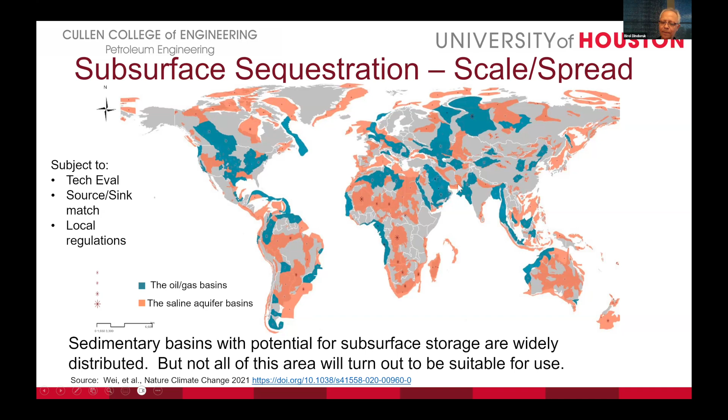Okay, so questions to be answered. Of course, we can drill the well, etc. The questions need to be answered from lab to the field at the end of the day. What you can do and what's relevant, especially at scale type of sequestration. Generally, what we do is this. We cannot do experiments in real time on it, especially if you look at the time scale.

So the general process for a large scale or even a pilot for subsurface implementation is that we run a numerical model. A numerical model can lead to virtual experimentation and certain outcome generations, and also help in monitoring and sequestering. But there are two issues with any kind of numerical model. One is, does it capture the physics? Do we have the right physics for it? Second is, how can I mimic that physics in real terms? In other words, how real it is.

Generally, if you want to represent a physical process, either we should have a predictive model, or, if the model is not predictive, how can I make it predictive? Making it predictive or more realistic requires certain types of data. So look at any of these models that we use for evaluation, well optimization: where would the CO2 plume be? What's the fate of it? And if I observe, where should I put my observation points or wells?

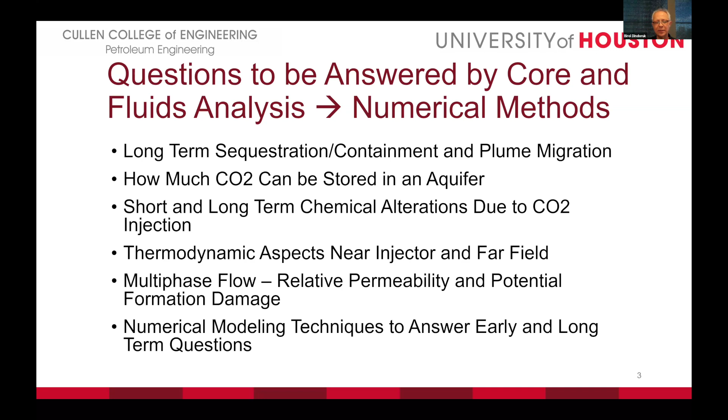But for subsurface appraisal data, whether it's an aquifer or oil reservoir, these are going to be pretty fundamental. One is petrography, thin sections, XRD, SEM analysis, scanning electron microscope, and calibrated porosity and permeability in representative lithologies. So do we have enough pore space, how many lithologies, how it changes, since eventually we are going to put it in a model.

Also, calibration of reservoir geomechanical and petrophysical properties. This is important, especially if we have the potential to exceed certain pressures. Generally, if you stay at or below initial pressure, we deem it safe. But when you bring in the reactive transport part of it, that may be different. And special core analysis and fluids. And of course, how fluids interact with the rock and in situ fluids will also be part of it.

And this includes seal capacity evaluation, reservoir model evaluation, trapping, and CO2 migration. For example, where would CO2 go? How would it go? What would be the trapping? And what would be the fluid compatibility? Would it precipitate something? Another question is, what would be the solubility limit?

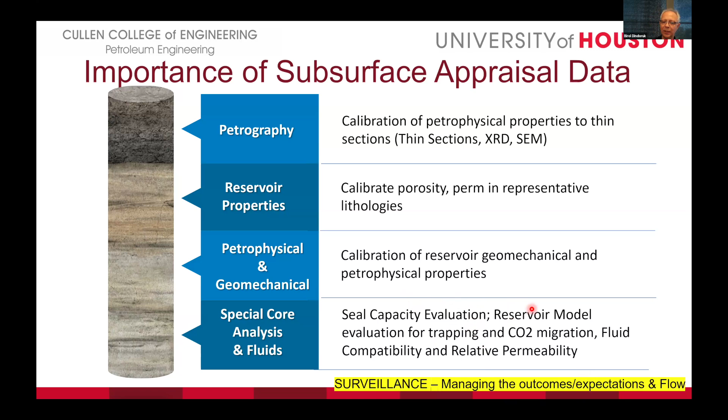So what are the similarities between aquifers and hydrocarbon systems and the differences? One is that water is everywhere, whether there is an oil reservoir or not, because one of the potential places that we can put the CO2 is depleted oil reservoirs or transition zones, non-commercial oil reservoirs, gas reservoirs, or basins, for example. One is the presence of water. It could be a natural transition zone, oil to gas, as well as oil to water, gas to water. I just give one example here.

But of course, it could be an artificial or man-made situation, that we have an oil reservoir and we water flooded it, or we had a gas reservoir, the aquifer encroached and flooded the reservoir. So in this case, we are almost converting a hydrocarbon reservoir into an aquifer. But of course, with hydrocarbon show.

Deep saline aquifers, well, one question about deep saline aquifers is how many of them are really pure water and salt? If you look closely, many of them have some hydrocarbon show, at least methane. So for example, the existence of methane is an impediment to CO2 dissolution. So we need to look at them. We can look at them in a simplistic way, but if you want to sequester something for thousands of years or whatever forever means, we need to look at all these things and we need to do relevant experiments.

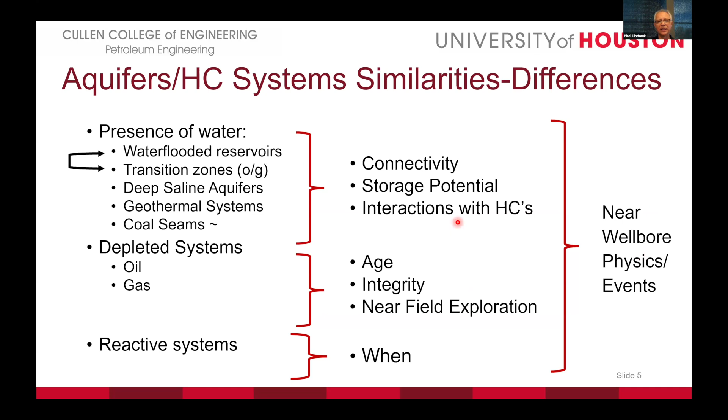So evaluation, I'm going to talk about experiments and data here. I'm going to focus on it a little more here for the sake of time. Maybe next time I'll talk about simulation. We use experimental data in analytical and numerical modeling. And of course, we use data analytics and correlative techniques.

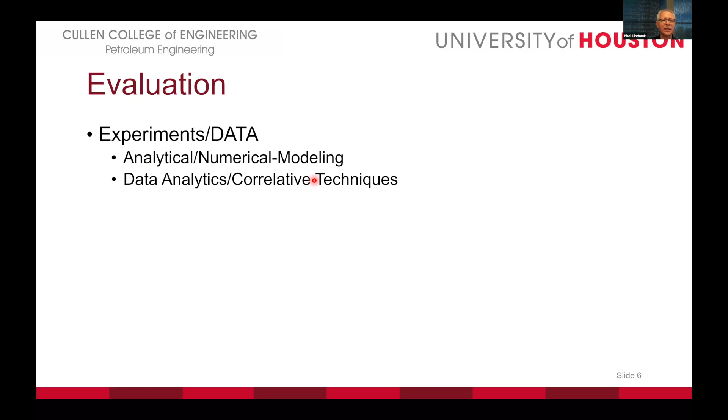For example, we have a recent publication where we use 2 deep water wells, a pair, with certain geological attributes and fluid attributes. And we generated an app through a sponsored project by Shell, actually. They sponsored it. It's declared in the paper as well. We look at how much CO2 we can inject in a deep water setting, as well as how much oil we can recover if we choose to recover, basically. But of course, we use experimental data and certain types of data analytics techniques for it. And I'll give you examples for some of the crucial data.

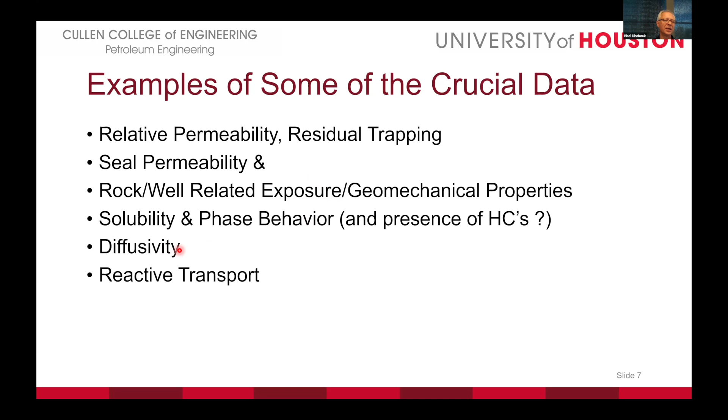One is relative permeability, residual trapping, seal permeability, rock and well related exposure, and geomechanical properties. Solubility, diffusivity is another one, because when the injection process stops, the only mixing mechanism left is the diffusive mixing, basically, and reactive transport is another one.

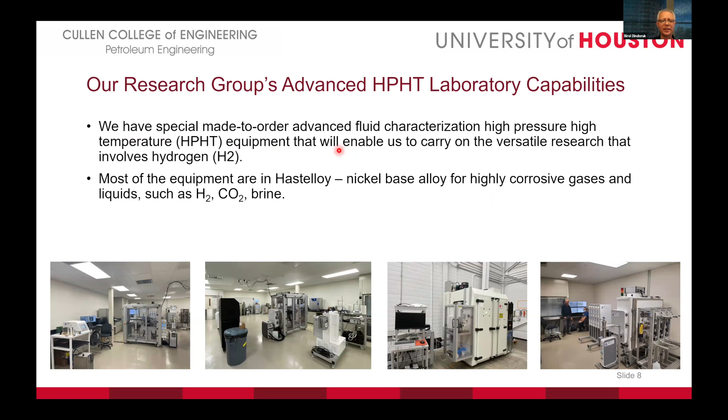So this is a scene from my laboratories, actually. We have state-of-the-art PVT cells and displacement apparatus, packed columns for reactive transport, and relative permeability measurement, etc. Anyway, if you want to visit, you are welcome to visit. We are in Technology Bridge, building 9, basically. So, of course, since we deal with CO2, you need a special alloy, etc. We took care of all of them as well.

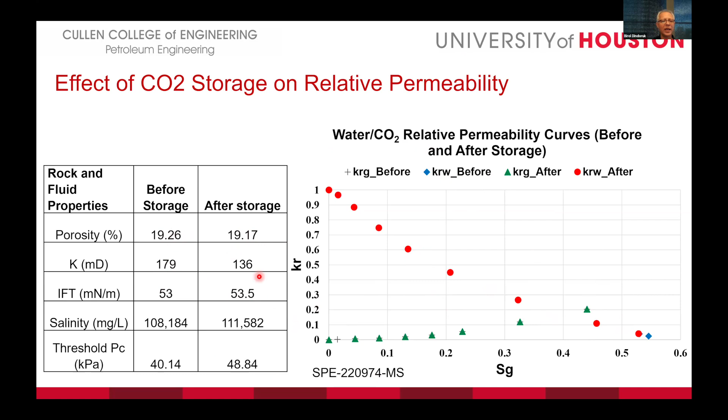So we did another experiment. Actually, this will be presented in a paper next month, at the CCUS conference in Houston, AAPG CCS conference. This is just one of the cases. So this particular one is a sandstone sample, but the sandstone has all sorts of other minerals in it. So we inject a lot of pore volumes of carbonated water in it.

Near the well, we pass a lot of fluid. And wells are extremely important for injectivity, safety, as well as if there's plugging, etc. That's what we are studying here. That's why we have so many pore volumes. So we did all sorts of measurements. We look at the mineralogy, we look at effluent analysis, we look at before and after analysis of the thin sections.

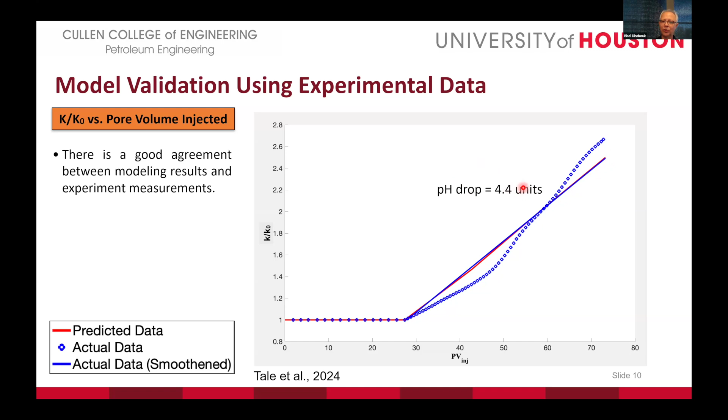Permeability improved more than twofold, actually, here. And the pH drop, because of CO2 exposure, is about 4.4 units. And residual trapping, we looked at the residual trapping. Now, this is a near wellbore aspect of it, but we looked at a simulation study as well. But before the simulation study, we have to provide a certain amount of data.

In general, CO2 goes into four different categories. I'll show you a plot of it as well. When we inject CO2, it goes into four different bins, actually. One is trapped, the other is the free CO2 plume, another one is the solution, and the fourth one is the mineralization. So time scales are different for those. And if you want to analyze all of them in one go, in multiple time scales, it's very cumbersome.

So we developed a process for it, actually. That's the paper that I was talking about. This paper got published. Instead of MS now, the dash is PA. That means peer approved. This is the precursor of it. So if you look here, we looked at the literature first, and we did laboratory measurements as well, because we have a joint consortium with Core Laboratories. In fact, we'll have a consortium meeting tomorrow, the fourth one, where we present the details of these studies.

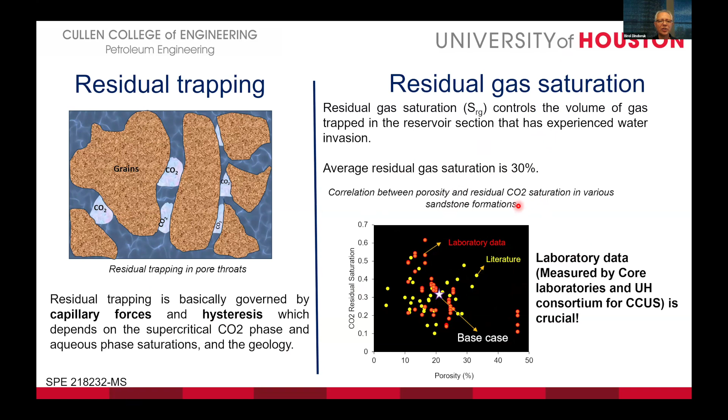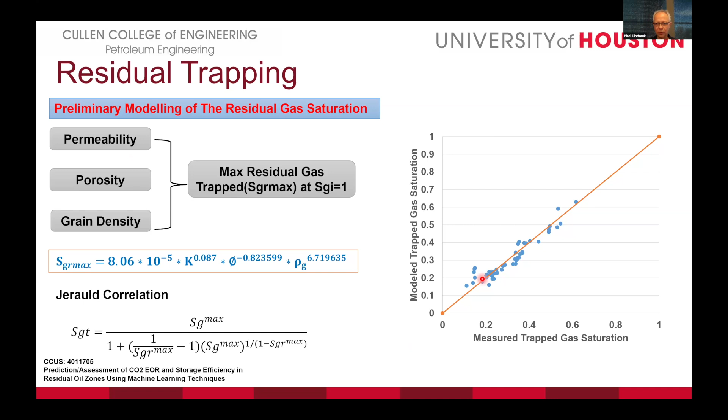So this is the supply end of it. You need to provide all this information: near wellbore phenomena, what happens; another one is the trapping, as well as relative permeability, and also what happens to your porosity. But we also need more information than that. I'll show you some of them.

We can also measure the caprock permeability. Caprock is normally shale or clay dominant seals, and they have nanodarcy type of permeability. You can say practically none, but over a certain time scale, this nanodarcy can transmit fluids, but also adsorb CO2. So we look at these from an adsorption point of view. One of the reasons we look at adsorption is that when everything stops, the limit that can react is the adsorbed amount, because the CO2 plume is gone.

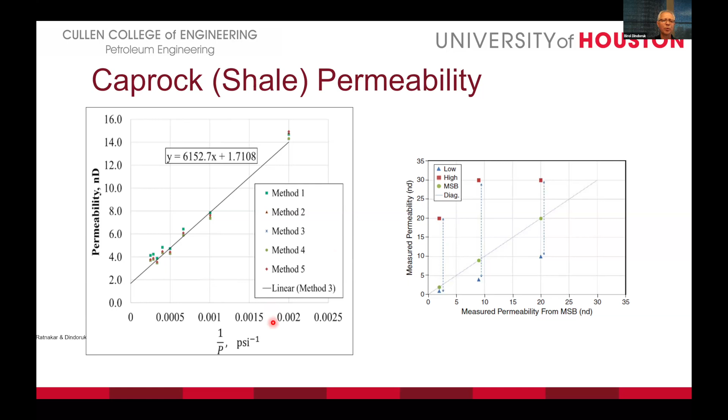Another one is that from adsorption, we were able to get permeability by a special immersion technique. We developed the technique with methane. Now we are working with CO2 with the same recipe, because we had to do a lot of experiments to be able to prove it. But the process is the same for any kind of gas. And then another study that we did is the following issue. This was also published about 3 years ago.

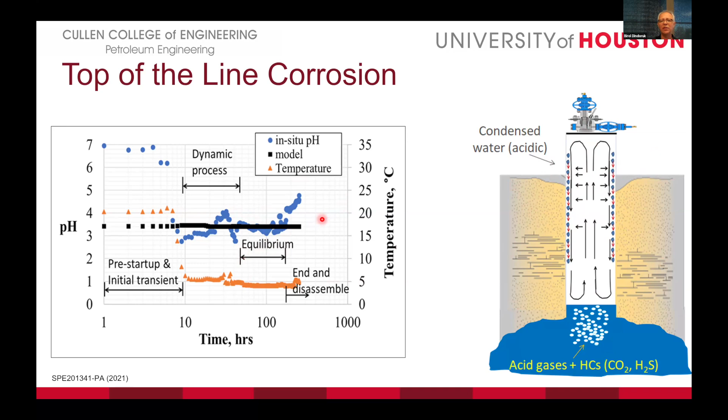CO2 concentration is related to pH and vice versa. We even did pH measurements in the laboratory for it.

Another one is when we look at solubility of CO2 in brine or aquifers, the question becomes the following. We have a CO2 plume and a huge amount of aquifer, and we have all the time, you can imagine, so to speak, for it to dissolve. Long time, in other words.

So now, most of the software packages and methodologies, they take sodium chloride TDS, or sodium chloride salinity. But the thing is that if you have different salt concentrations, your CO2 solubility is going to be different depending on what salts you have. So we did some data analytics type work, using physics-based models, on it.

We have 3 different papers, because as we progress, we figured out more and more complicated cases. At the beginning, we had pure CO2, then later on we tried other gases. Now we are working on mixtures of gases as well.

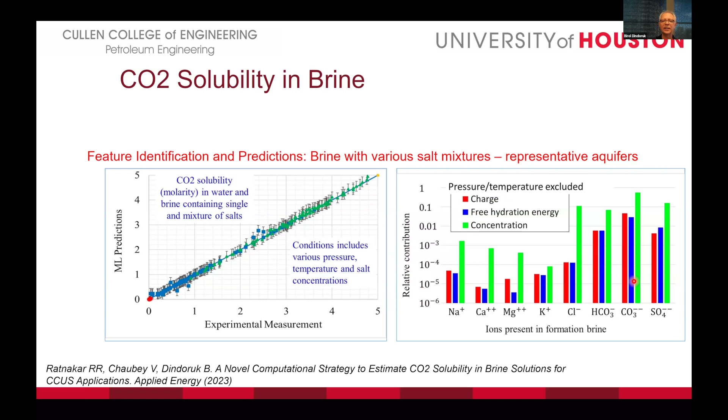So what we did is we put this particular thing after not only writing the software, not only writing the paper, we also put out an app, actually a free app you can find by searching, or through my website at University of Houston. We have about 4 different apps for different things, free apps, at least for now, that you can use, because maintenance is an issue. I don't know how long you can keep up with it, but it has been there about 2-3 years, all of them.

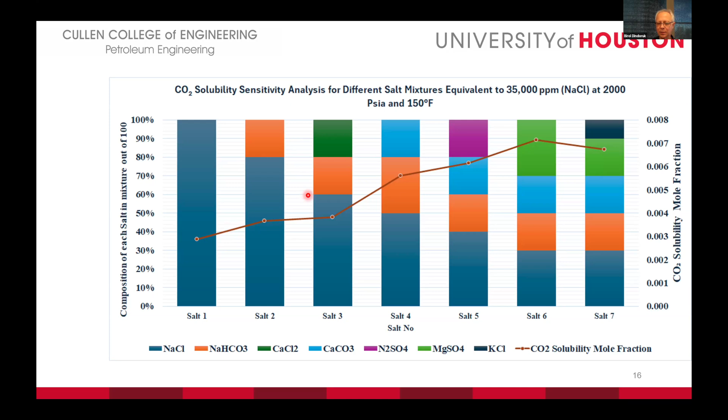Another thing, for example, this is also very important for geothermal waters, because geothermal waters have different salts and different solubility, and geothermal waters have CO2 in them as well, natural CO2. So there is an application for geothermal that I'm not going to go into the details of here. There's more motivation behind this work than what I'm focusing on here.

Another thing that I've done here is that, we are dealing with CO2 all over the place, and every time you need a different app, different software, and you have to pay, or you need to go to the website, click on it. So this is actually something I did.

I have a lot of experience in curve fitting, in simple terms. So I curve fit basically all the CO2 properties using NIST data in one go. For example, this curve is a continuous curve here, and this is a vapor phase. This is the supercritical region. We even inflated here to show you how good it is.

So you can basically take this equation. It's explicit, it's published. You can code it in Excel and figure out CO2 properties, not only density, but other properties like heat capacity, viscosity, and all that, because we want the freedom to code them into our own codes independently of other things. It may seem simple, but if you want a single equation for an entire system, especially if it's going from subcritical to supercritical, you don't even need to know where you are. It's a continuous curve.

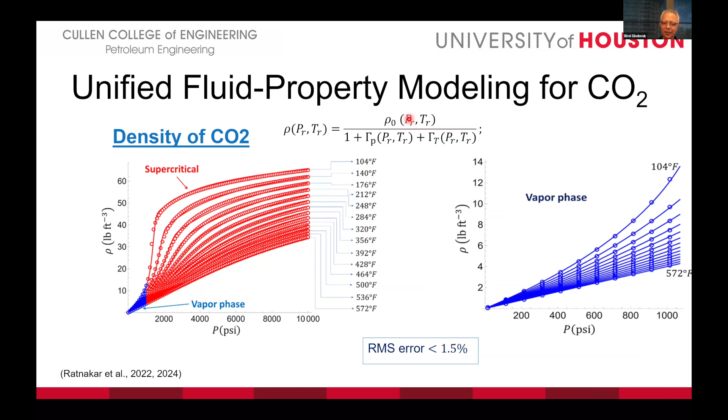There are other advantages. So another thing we're doing in our laboratory is this. I've been working on pressure and diffusivity measurements for 10 years continuously. We've made a lot of progress on this.

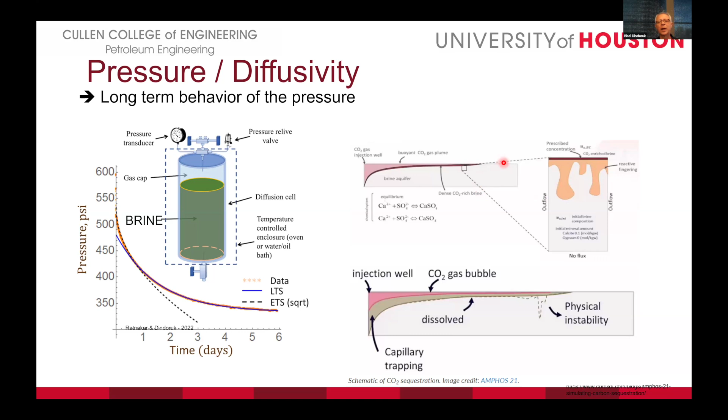One of the things about CO2 solubility is that when the CO2 plume overrides the column, it dissolves in brine, and the brine becomes heavier. As a result, it starts fingering because heavier fluid cannot stay on top. It becomes unconditionally unstable, leading to viscous fingering and viscous mixing. So we tried to figure out, before this onset of mixing, we looked at CO2 diffusivity. We measure other gases too, measuring CO2 diffusivity in different brines in our laboratory and modeling that as well.

Just last summer we published this. We measured diffusivity for different brines, and it turned out to be linear, with the inverse of diffusivity being linear with brine salinity. So if you want to mimic diffusive mixing after injection, since it's the dominant mixing mechanism, you need to put these numbers into a numerical model in a way that you scale it up. I need to make that statement as well.

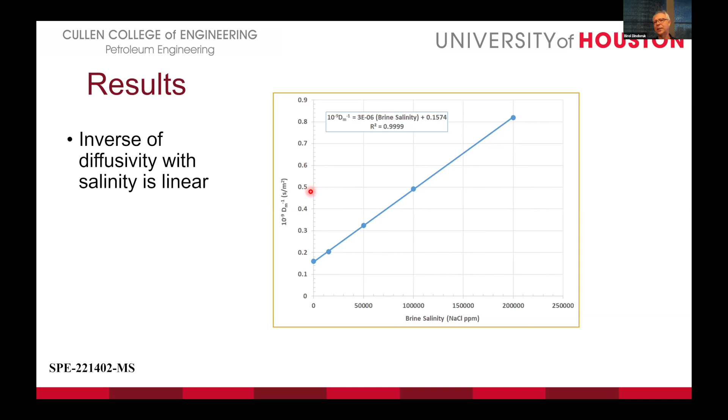So again, we're not only doing the numerical models, we're also working on the supply side of information into these models. In one of our simulation studies, which is published, we looked at the elements: structural trapping, residual trapping, solubility trapping, mineralization. We left it there because we run our models up to 300 years, and mineralization becomes dominant after that.

So our purpose here is this: you do all the sensitivity analysis with a black oil model, which is fast, up to 300 years. Then you select a subset and run the rest compositionally with reactive transport to capture the impact of mineralization. As you can see, mineral trapping becomes dominant later on. The initial part we already captured because we know certain minerals dissolve fast, and we've done the experiments accordingly.

And then what we want to know is that when you put the CO2 in, it can go into one of these categories. We want the safest one in terms of time dependence. So the best way to sequester CO2 is if you can sequester it in residual form, solubility form, and mineralization form, then you don't need to worry about leakage anymore, because there's no CO2 plume left. So we also look at what kinds of things will change these categories and optimize it.

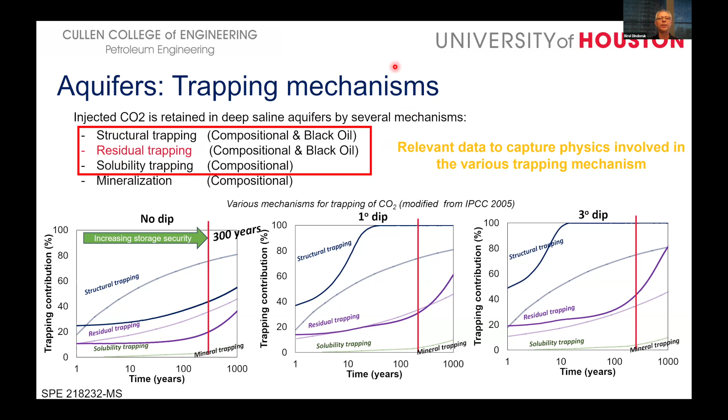So in summary, if I were to summarize my talk: basic data is needed for de-risking and screening storage reservoirs. Evaluation of outcome surveillance data requires representative input data, fluid data, numerical representation, and scale up. I didn't talk about hydrocarbon showcases here. We did studies on hydrocarbon showcases because sometimes CO2 can precipitate asphaltenes, and solubility is also different in hydrocarbons. That would be, I guess, the next presentation on the topic if we were to do it.

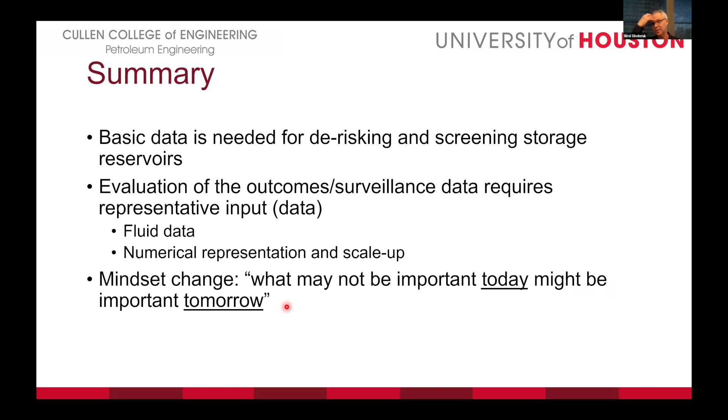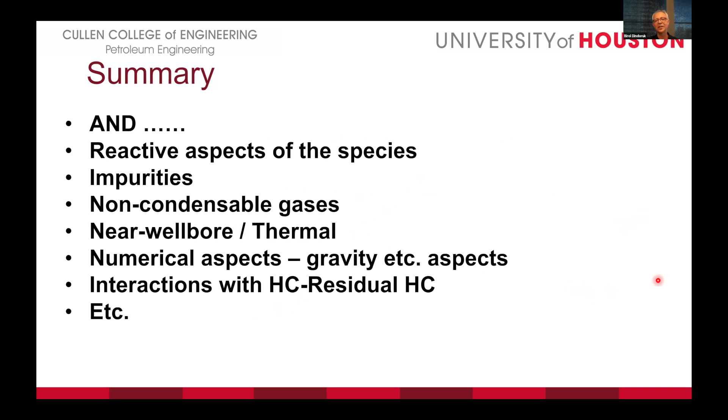Numerical representation and scale up, and mindset change also - what may not be important today might be important tomorrow, since we're looking at these things over the very long term. Of course, we can look at reactive aspects of species, impurities, because it's not pure CO2, non-condensable gases, near wellbore effects like thermal and numerical aspects, and interactions again with the hydrocarbon side as well.